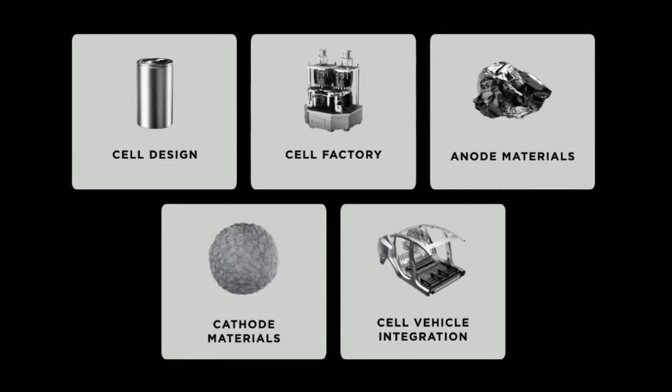Elon Musk, joined by Tesla's SVP of Powertrain and Energy Engineering, Drew Baglino, announced their plan to halve the cost of the EV battery. They outlined a 5-part plan that is truly revolutionary. And yet, the response was largely silent. In fact, Tesla's event and announcements actually sent their stock price tumbling in after-hours trading because analysts and investors were unable to grasp the significance of what had been shared.

Spurred on by the climate change crisis and a genuine desire to save the human race, Elon started by reiterating the importance to 'accelerate the advent of sustainable energy because time really matters.' He continued that Tesla's role, to achieve this transition to sustainable energy, means they must produce more affordable EVs and energy storage. In most aspects of Tesla's product focus, batteries are of extreme importance, and for the future of the human race, affordable batteries produced at massive scale are essential.

Tesla's battery production goal is to have 3 terawatt hours of energy storage production annually by 2030. To put that in perspective, that's about 80 times larger than Tesla's current production rate, or enough to produce 40 million 75 kilowatt hour battery packs like those in the Model 3. Of course, they won't be producing 40 million vehicles per year—much of that battery production will be used in static storage and grid-level systems as well.

So let's take a closer look at Tesla's plan to cut the cost of the battery cell in half. Their 5-part focus is on cell design, cell manufacturing, anode materials, cathode materials, and vehicle integration. Let's look at cell design first.

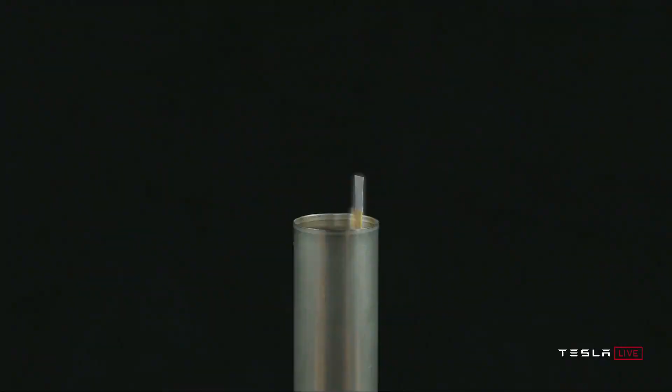The same goes for Tesla's current battery cells. The 2170 form factor batteries used in the Model 3 and Model Y have 50% more energy than the 18650 cells used in the Model S and Model X. Drew Baglino explained that while current cells have been an improvement, Tesla needed to 'study the full spectrum of options' when looking for the ideal cell design.

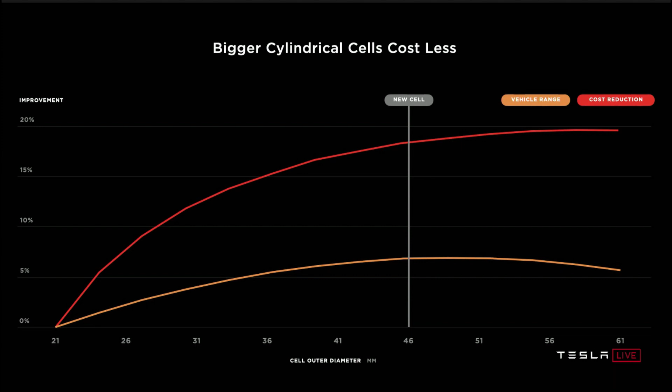They determined that low cell cost, while maximizing range, was best achieved with a cell using a 4680 form factor. Just a quick side note, if I've lost you already, that's okay—the form factor of cells describes the size of the cell.

For example, a 2170 cell is 21 millimeters in diameter and 70 millimeters in length. So the new cells Tesla will be producing are 46 millimeters in diameter and 80 millimeters in length.

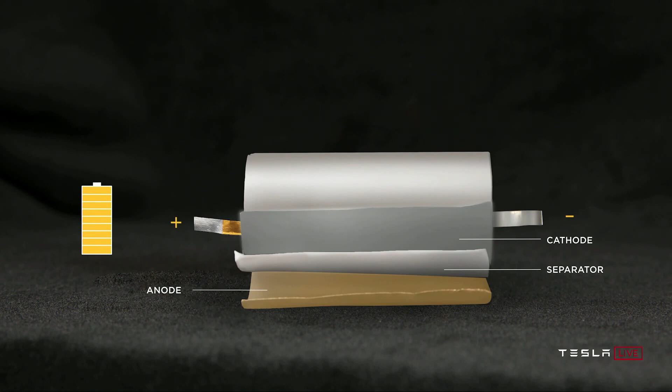However, building a bigger form factor battery has its downsides, and this is where eliminating the tab from the design of the cell is so crucial. As you make bigger cells, the electrons have a further distance to flow from one side of the battery to the other, and in doing so, resistance and therefore heat increase. Thermal management of batteries is significantly important to maintaining performance and safety.

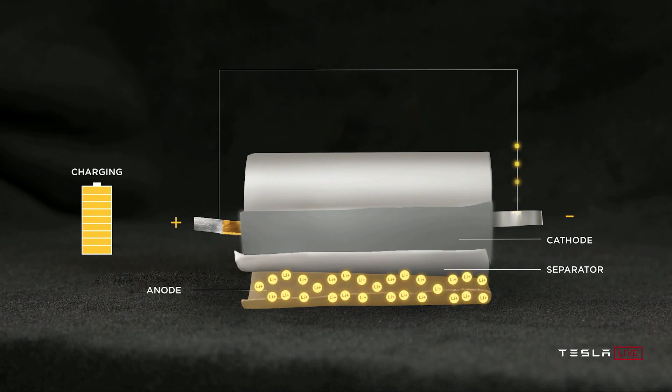So they had to come up with a way to design a bigger battery cell while minimizing the distance the electrons needed to travel. Enter tabless cell architecture. By folding dozens of connections into a shingled spiral form, Tesla can eliminate the need for a tab on either end of the battery and allow electrons to flow more freely over 1/5 the distance. This reduces resistance and heat within the cell and allows for dramatically faster charging and discharging rates, as well as being the pivotal factor that allows for a larger cell.

Here's what Elon and Drew both had to say about designing a tabless cell.

This is quite hard to do. Nobody's done it before. And it really took a tremendous amount of effort within Tesla engineering to figure out how do we make a freaking tabless cell and have it actually work and then connect that to the top cap. There's a whole bunch of things that we're keeping a little secret sauce here that we're not telling everything. But sometimes what's elegant and simple is still hard, and it took us a lot of trials, but we're happy where we ended up.

Yeah, I mean everything's simple in recollection. After you simplify everything, it's hard until it's discovered, and then it's simple.

So anyway, but there's a lot of really cool things going on that enable tabless, and it's really due to a really great engineering team. Drew and the rest of the team have done amazing work in achieving this tabless construction. And it may sort of sound a bit silly to some people, but for people that really know cells, this is a massive breakthrough.

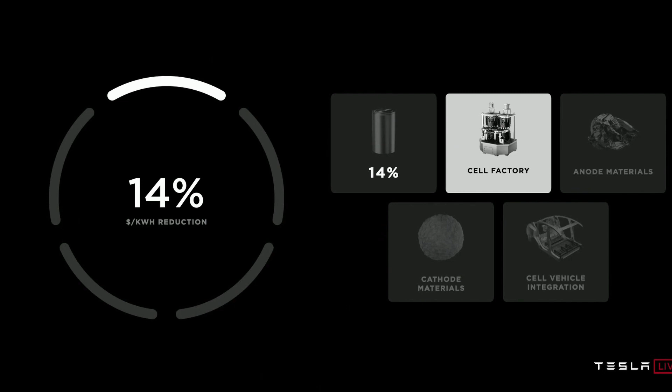Tesla expects these new battery cells to contain 5 times the energy and 6 times the power output while increasing vehicle range by 16%, all while decreasing in cost and simplifying the manufacturing process. This cell form factor change allows for a 14% reduction in cost, not the entire 56% that they showed, but there are still 4 other pieces of the puzzle that they had to share with us.

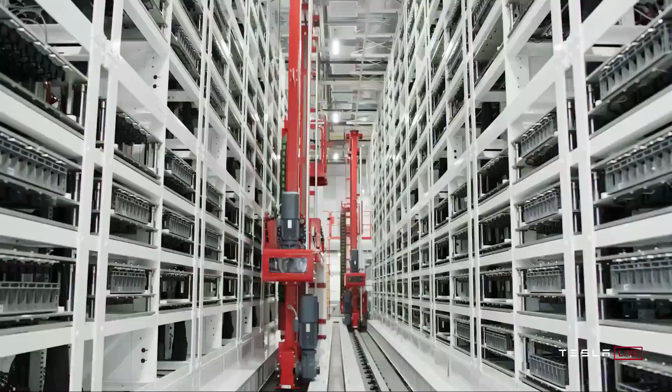Inspired by the continuous movement and seamless production processes from the printing and bottling industries, Tesla sought to apply these manufacturing techniques to battery cell production. Here's what Drew Baglino had to say about it.

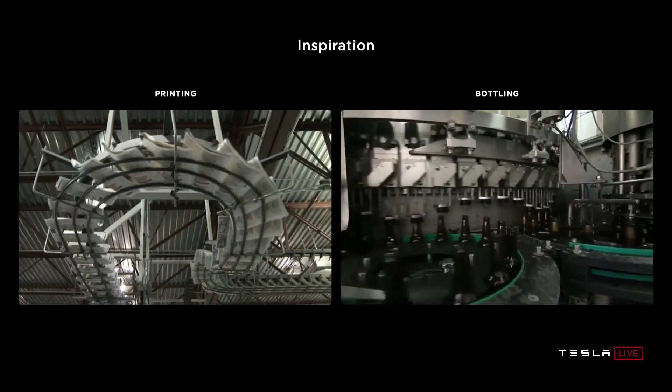When thinking about the ideal cell factory, we have inspirations behind us in the paper and bottling industry, where from humble beginnings, over a century of innovation has enabled mass scale, continuous motion, unbelievably low manufacturing cost. And when we think about the lithium ion industry, which is really only in its 3rd decade of high volume production, it has so far to go to achieve similar scale and simplicity. And that was the inspiration that we set out to the team as we thought about how to marry cell design and manufacturing in the best possible factory.

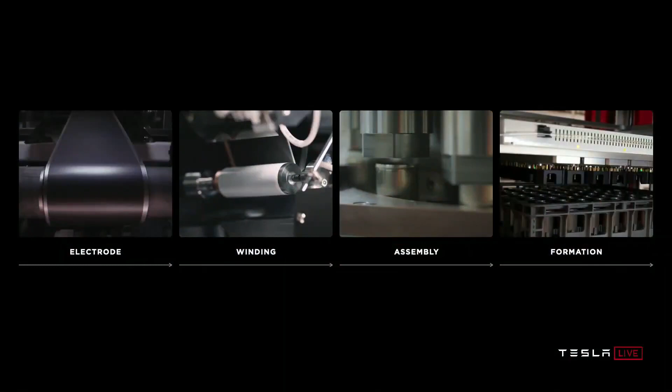When manufacturing batteries, there are 4 primary steps or components in the factory process: electrode coating, winding, assembly, and formation. In an effort to make cell manufacturing scalable and more efficient, Tesla looked to make improvements in all 4 of these areas. The first, electrode coating, may be one of the most anticipated aspects of their announcement.

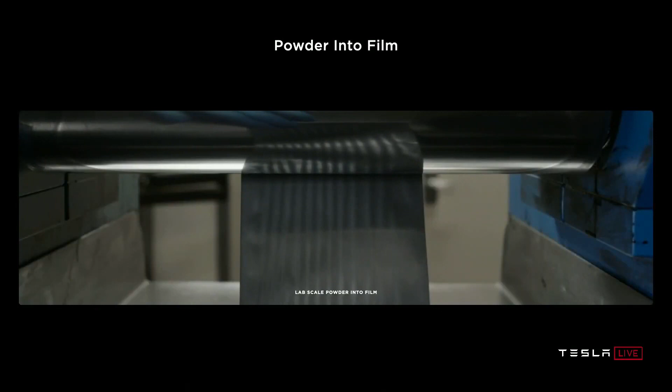As I mentioned in my Battery Day Expectations episode, Tesla acquired Maxwell Technologies and started to implement their dry battery electrode process. They've since improved on that process many times, and they still expect to innovate even further as time goes on. This dry battery electrode process saves them a lot of time, money, and, maybe most importantly, factory space.

As to the effect of the other steps in the manufacturing process, I'll let Drew Baglino share the remarkable change in output.

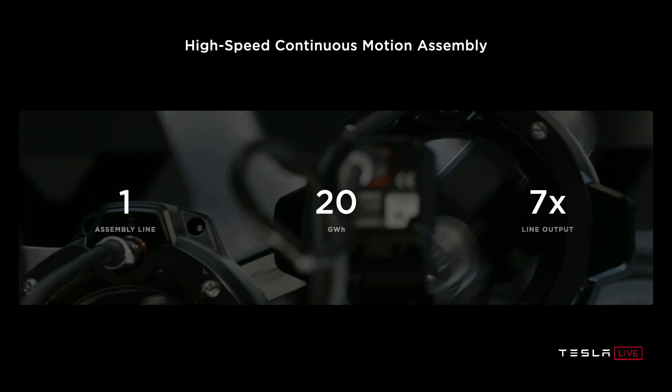We were able to get to the point where we can implement assembly lines, one line, 20 gigawatt hours, 7 times increase in output per line. And when you're thinking about scalability and pure effort, having one line be 7x the capability is just effort multiplying. Yeah. So...

You can tell that those who were in the audience really approved of that, but Drew continued by identifying how Tesla's improvements in battery manufacturing fit into the plan at large.

And not only is all of that manufacturing innovation fantastic for enabling scale, it's also an additional 18% reduction in dollar per kilowatt hour at the battery pack level. But wait, there's more.

And there was more, but I'm going to skip over the anode and cathode pieces of the puzzle, only mentioning that they were worth, or are worth, 5% and 12% respectively.

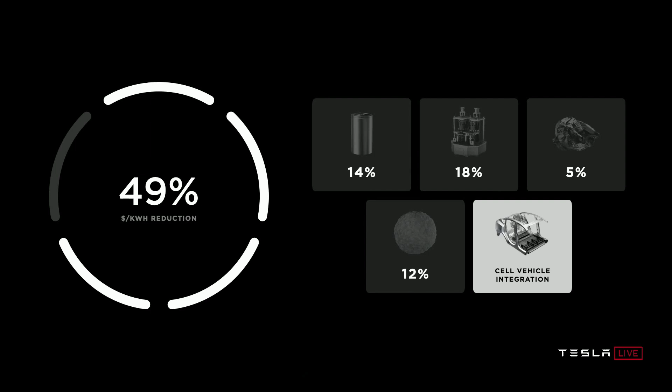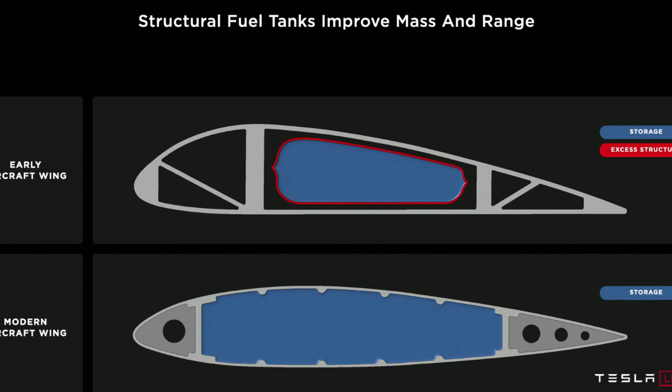And the last part of Tesla's 5-part focus is cell vehicle integration. Elon really hit the point home when he compared their new design to an airplane fuel tank and wing design. In the early days of aircraft, they would carry the fuel tanks as cargo. It was very difficult, and then somebody said, 'Hey, what if we just make the wing tanks? What if we just make the fuel tank in wing shape?'

So all modern airplanes, the wing is just a fuel tank in wing shape. This is absolutely the way to do it. So Tesla applied that design to vehicles, combined with the front and rear unibody castings that they have started to do for the Model Y. The battery pack will now become directly integrated with the floor pan and underbelly of the vehicle, not only saving weight, but also increasing torsional rigidity. It's a truly revolutionary step forward in vehicle manufacturing, and I'll leave it to Drew to describe in his own words the impact and good news of how this relates to the bigger picture.

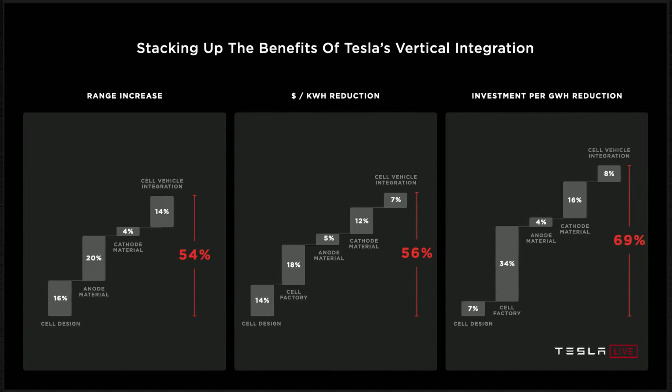It is worth another 7% dollar per kilowatt hour reduction at the battery pack level, bringing our total reductions now to 56% dollars per kilowatt hour. Honestly, if you left it at that, it would be the most significant announcement in recent automobile history. But they continued to illustrate how this would benefit the business not only in reducing the cost per kilowatt hour, but also by increasing the range of their vehicles by 54% and decreasing the investment per gigawatt hour by 69%. So by focusing on manufacturing efficiency, Tesla is... to be honest, I'm still stunned by this a week later.

And yes, it's now more than a week since Tesla's Battery Day, and I'm still digesting all of the incredible announcements. You could take this and apply it to their 402-mile Model S long range, add 54% range to that. It's just spectacular. And I think probably one of the things that they should do is, instead of having a car with a range of 500-600 miles or whatever, actually decrease the size of the battery pack, lighten weight, improve the efficiency of the vehicle, and have a 350-400 mile or so range for the Model 3. Model S will always be more.

But the last two items of note worth mentioning relate to how this will affect Tesla's future products. They made two very significant announcements. The first being that they do plan on producing a subcompact model that will cost $25,000, which is just mind-blowing. But knowing what we know now about their manufacturing process and how much they can save, I think it's very possible for them to produce a $25,000 car and still have a really healthy profit margin.

And then the second of the product announcements was for the Plaid Mode Model S. It's available to order as of Battery Day last week. $140,000 roughly, but the performance is staggering, and the metrics that they announced happen to just beat out the Lucid Air by this much. A 520-mile range compared to the Air's 517. A sub 9-second quarter mile. 0 to 60 in under 2 seconds. And a top speed of 200 miles an hour.